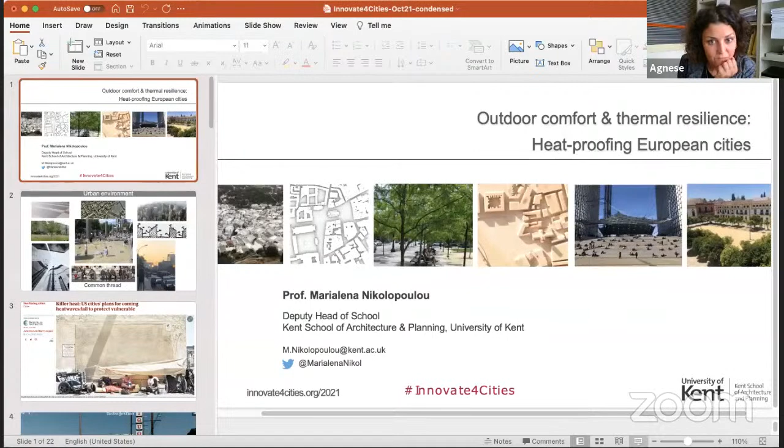So, hello, everyone. It's a real pleasure to be here today. And I would like to focus my discussion on the issue of outdoor thermal comfort and thermal resilience in the context of heat-proofing European cities.

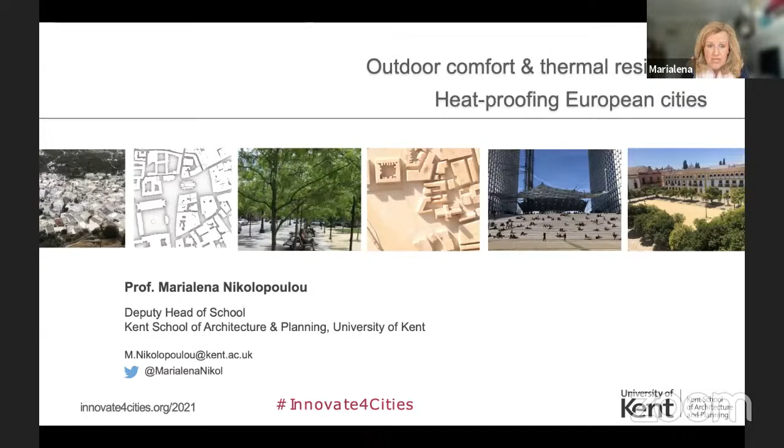As Rohinton highlighted, I'm from the University of Kent, and I would like us just to take a step back and remind ourselves what the urban environment is and what a city is. Effectively, complex systems of interconnecting links: individual buildings, urban blocks, roads, parks, transport infrastructure. All these actually affect environmental quality, which in turn affects human health.

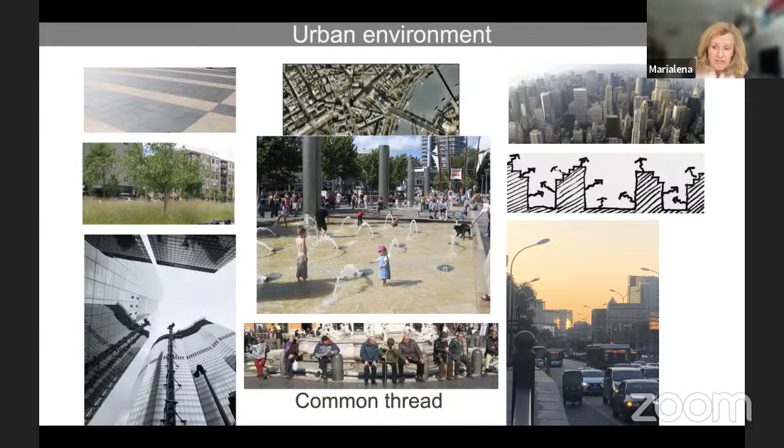And against this very complex background, people are an integral part of this system. In fact, they're the common thread. So understanding how people behave in this system could eventually enable us to use urban design constructively. We could argue to even improve environmental quality, but definitely increase our resilience and our adaptive capacity at different levels.

So it is also important to realize what the implications for development of cities are by putting greater emphasis on outdoor comfort and improving the conditions outside. Effectively, by controlling sources of discomfort, we can increase various types of activities which don't require additional energy: sedentary activities, cycling or walking, and use of public transport.

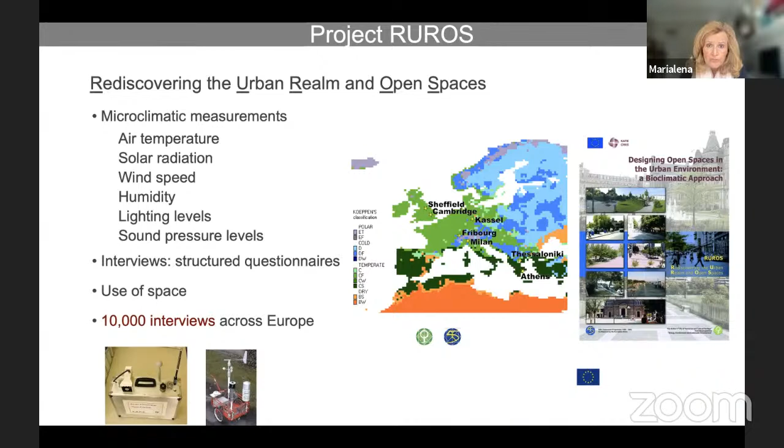It's important to realize that whether consciously or unconsciously, irrespective of where you are in Europe, conditions will be very much affected. So outdoor comfort will influence use of space.

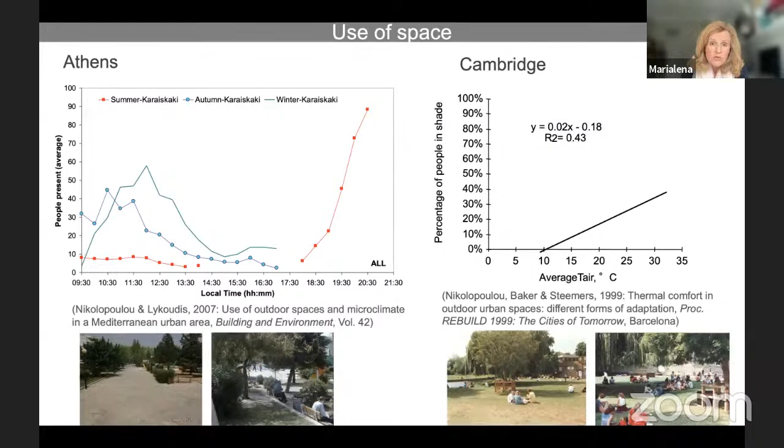And it's not just Southern Europe—we see similar patterns moving further north. Interestingly, even in Cambridge, we'd see people start moving to shaded places or avoiding sunny places as temperatures increased. So this shows the direct relationship between microclimatic conditions, outdoor comfort, and use of space, which is important to remember when planning or designing our cities.

Discussing with individuals, we tried to understand how they evaluated comfort conditions. As expected, across Europe in different countries we see a variety of conditions, and the majority of people would be found somewhere in the middle—feeling cool, neither warm nor cool, or warm.

What became particularly interesting is when we started understanding the conditions of thermal discomfort—effectively where people found it very hot or very cold. You'd probably expect that where you have the coldest temperatures, like Northern Europe, people would complain about very cold conditions because temperatures are lower. But it was completely the opposite.

This highlights that it's not a direct relationship between the stimulation and the perception, but there are other parameters that come into play, important to understand in order to help us improve both personal as well as spatial resilience in cities.

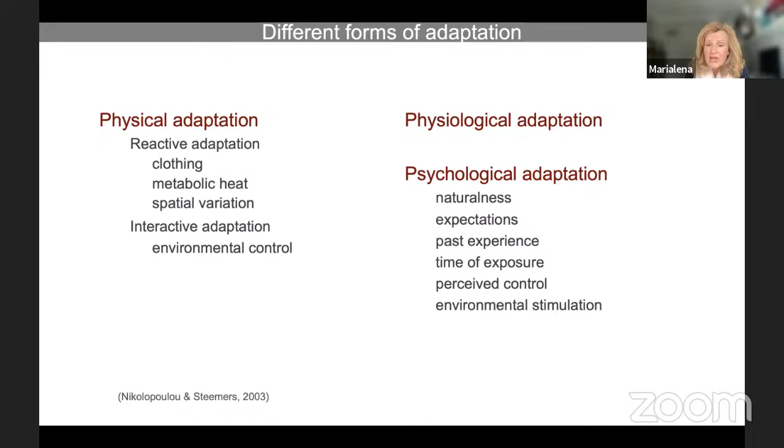Another very important parameter is psychological adaptation. Effectively, all these parameters inform our understanding of the surrounding space—how natural an environment is, our expectations from a specific place, past experiences, how long we'll spend there, whether we can cope with discomfort, and whether we have mechanisms to control it. Our perception of control is more important than whether the mechanism is exercised or not, as well as the environmental stimulation—the reason we find ourselves outdoors.

This is really where design interventions can start having an effect through different kinds of shading we are all familiar with, whether using fabric or more advanced modes of shading—even art used as a shading device—as well as urban morphology.

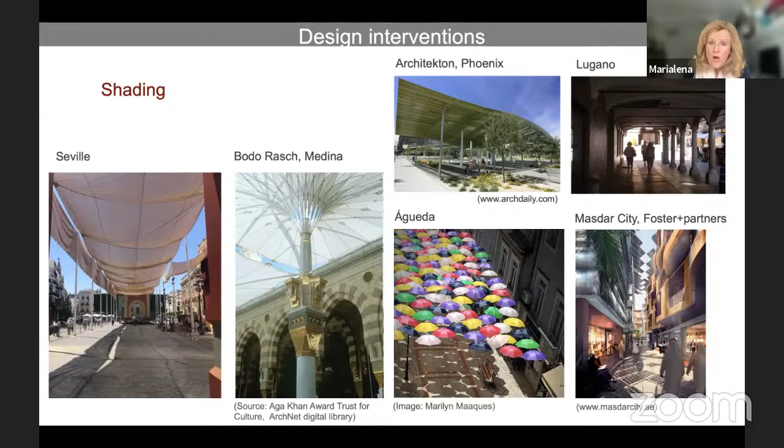Or natural solutions such as vegetation or trees included at different scales, and how we've got a whole infrastructure that can be part of a network, enabling us to use different spaces without necessarily being exposed to the sun, if that is a requirement.

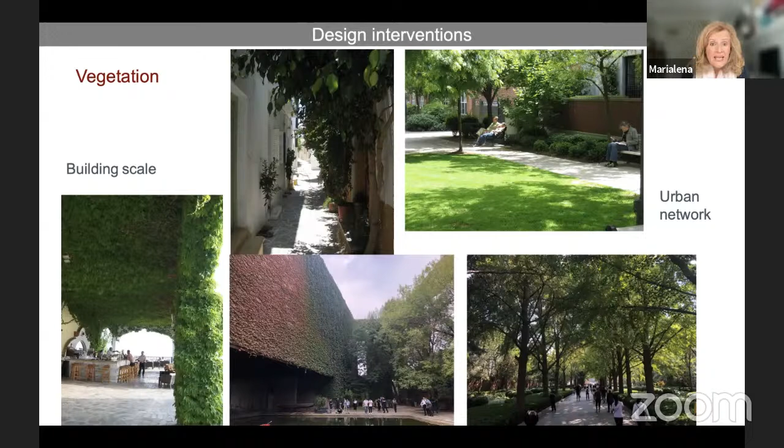Then again, we've got other parameters and other design strategies, and we know that different types of water have been used extensively in design to cool urban environments, leading to great satisfaction.

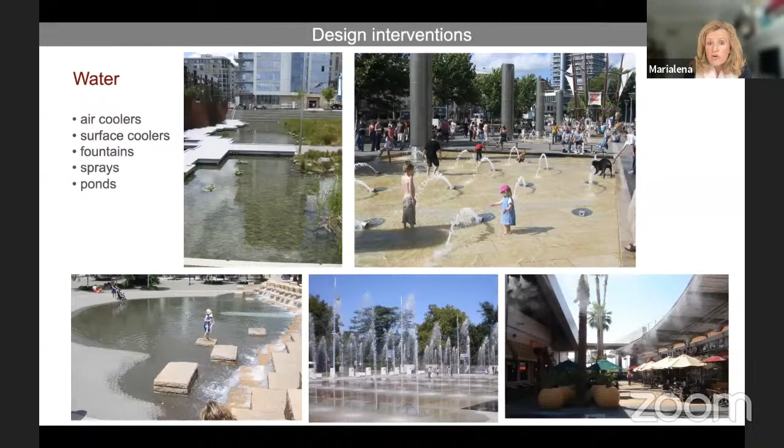And of course, we have different types of materials, from more traditional to more advanced, that can have very different effects and can be manipulated accordingly into the urban environment.

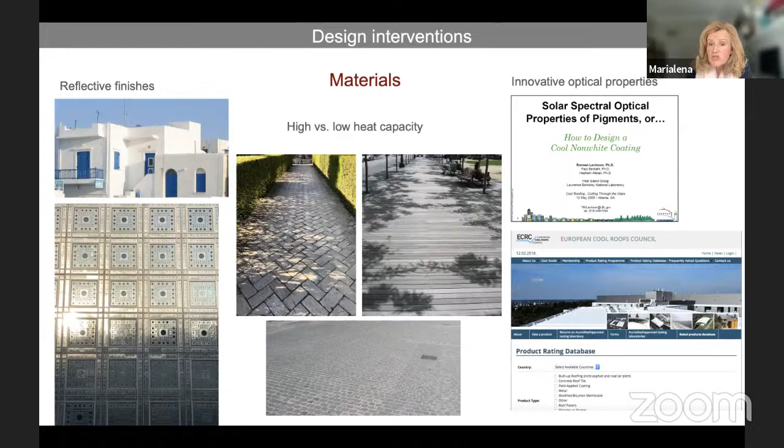It's the materials, as well as, as we've examined in other projects, the urban geometry and what effect that has on surrounding conditions, both in terms of physical parameters and comfort.

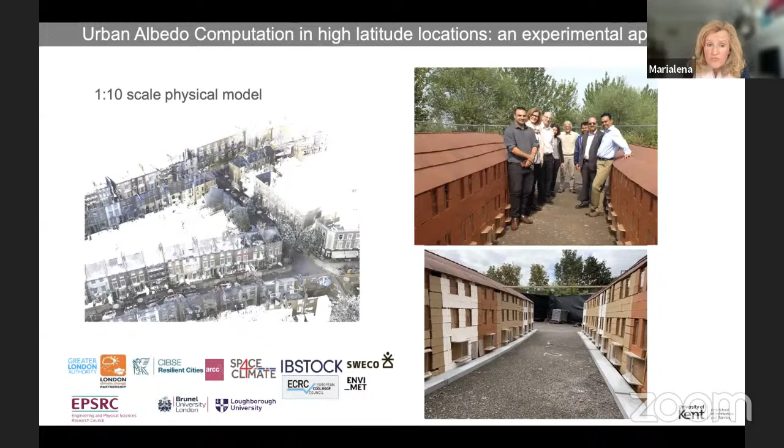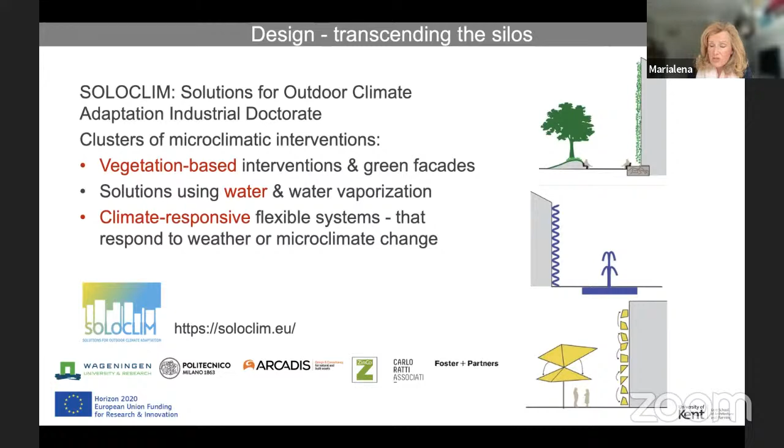More recently, we've started looking at these clusters of interventions and how we can start transcending the silos. It's not really just about vegetation on its own, but how we can start using networks—vegetation-based interventions, water-based interventions, as well as other more flexible climate-responsive systems—for the benefit of urban environments.

One last point I'd like to highlight, beyond the design per se, is the sociocultural influences in outdoor thermal comfort. If I may highlight another study, we were looking at comfort conditions in very similar climatic conditions in Northern Africa, in Marrakesh, and in Phoenix, Arizona, where the temperatures were very similar both in wintertime and summertime.

But they varied significantly in terms of how people were responding. For example, in Phoenix, Arizona, people would be exposed to air conditioning for much longer periods of time—coming out of an air-conditioned house, using an air-conditioned car, before going to an air-conditioned office. For the majority of time they were exposed to air conditioning, which very much influenced their evaluation of thermal comfort, limiting this adaptation capacity.

But what was particularly important, as we discovered, is the socioeconomic background and the influence this has on outdoor comfort as well as outdoor use. What was highlighted from both Phoenix, Arizona and Marrakesh, with very similar findings, was that the lower the socioeconomic background, the more important the need for open spaces becomes.

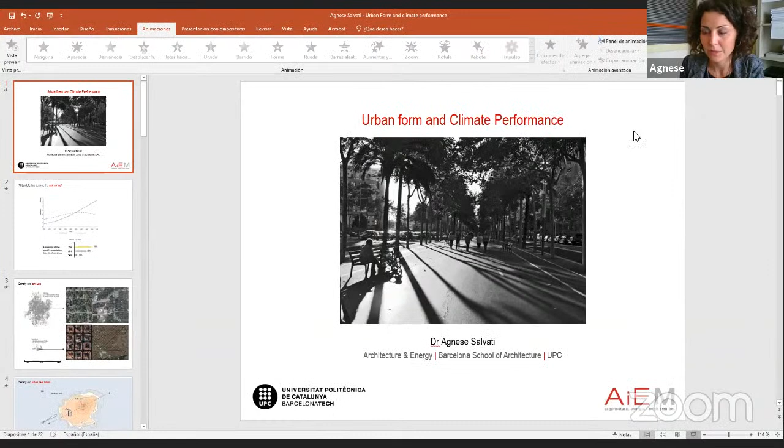Yes, hello everybody, I'm going to share the screen. This one. Okay. Can you correctly see the presentation mode? Okay, yes, okay, hello everybody.

Thank you very much for having me at this interesting conference, and thank you to Marialena for this introduction to my presentation, which is really perfect, because she showed the importance of urban microclimate to understand the well-being of urban citizens. So now I would like to show a few slides about the relationship we found between urban form and urban microclimate, and how urban form can affect the microclimate performance of cities, in particular Mediterranean cities. So I will show some results for Barcelona.

I think this is a very interesting, urgent topic, because as we know, urban population has already overcome rural population, and the trend shows it will still grow. So we need to design cities that are able to accommodate this increase in population, and the most efficient way to do it is probably by increasing density, increasing building density.

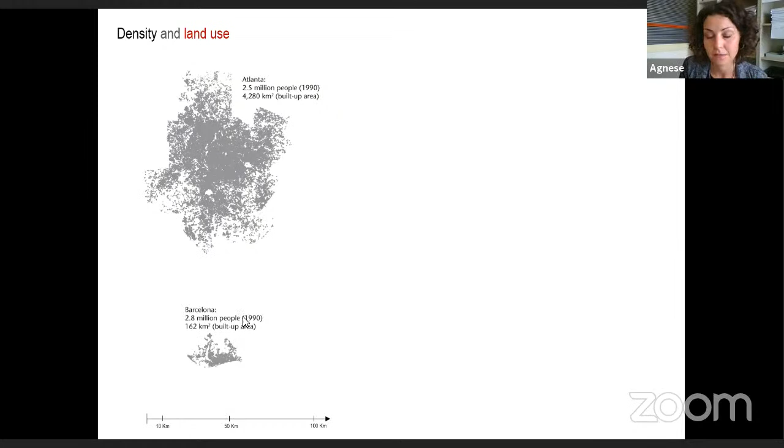And this is why compact, dense cities are said to be more sustainable models. Why? Because if we compare, for instance, these two cities, Barcelona on the bottom with Atlanta, they have basically the same population, but as you can see on the same scale, the footprint of the cities is quite different. It means Barcelona has a lower footprint, and so a better environmental performance, urbanizes less new land. But of course, this has an implication on the form of the urban fabric and the density of the buildings. The urban fabric in Barcelona is much denser than in Atlanta, with implications for the space for vegetation and other implications on urban microclimate.

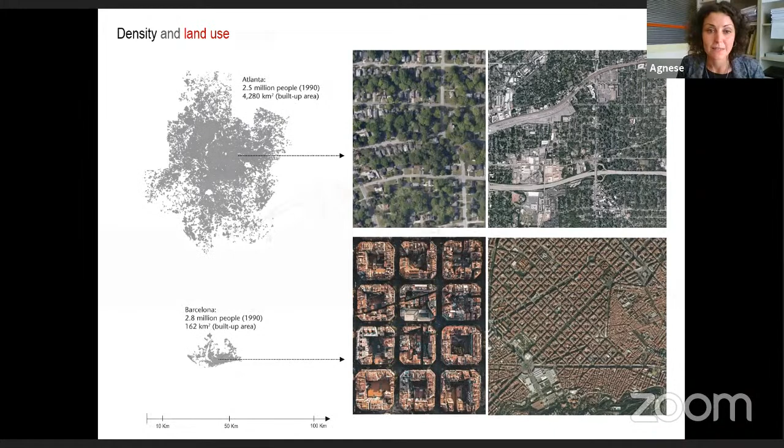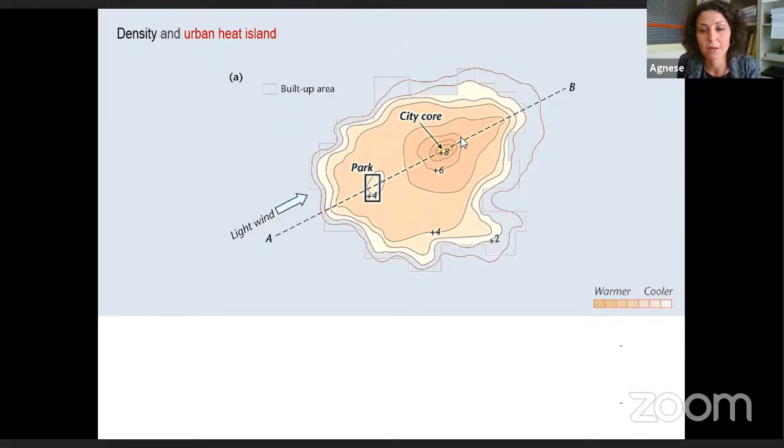Because what happens is that when we increase the density of a city, when we increase the density of buildings, we also intensify the so-called heat island effect. So if we think about a city, we know that the urban temperature is higher than the surrounding rural areas because of many factors, and one of the most important is basically the density of buildings.

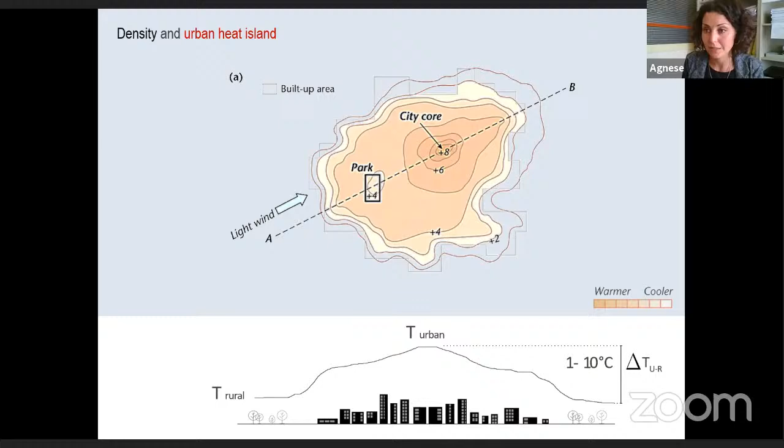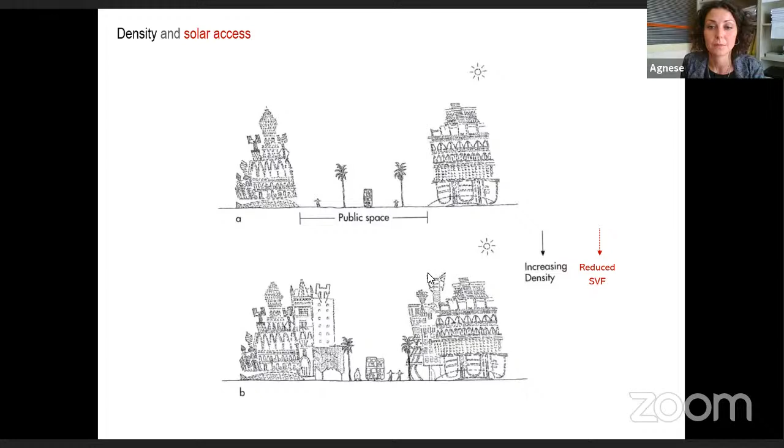In fact, the denser core of the cities, the city center, is generally the hottest spot in a city compared to the rural environments that are a cooler area. So in a dense, compact city, we generally have a strong heat island effect, a strong increase in urban temperature. On the other hand, when we increase the density of buildings, we reduce the public space.

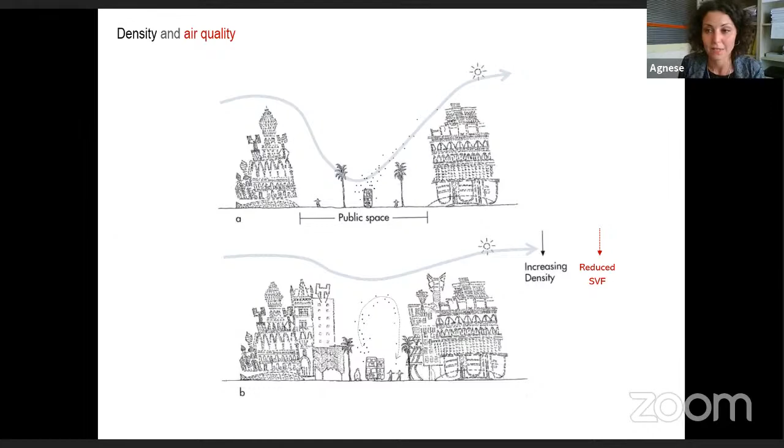This has implications on the solar access of streets and facades, and also on the ventilation of public spaces, or the so-called urban canyons, the streets, which causes also an increase of contamination levels. So compactness or density comes at the cost of some microclimate implications that are probably not so favorable in terms of energy efficiency or microclimate performance.

That's why we wanted to investigate a bit more in a city like Barcelona, that today looks like this, a very compact and dense city in the Mediterranean region. Is this a sustainable model in terms of energy efficiency and also microclimate performance, considering this impact of density on urban temperature and heat island effect?

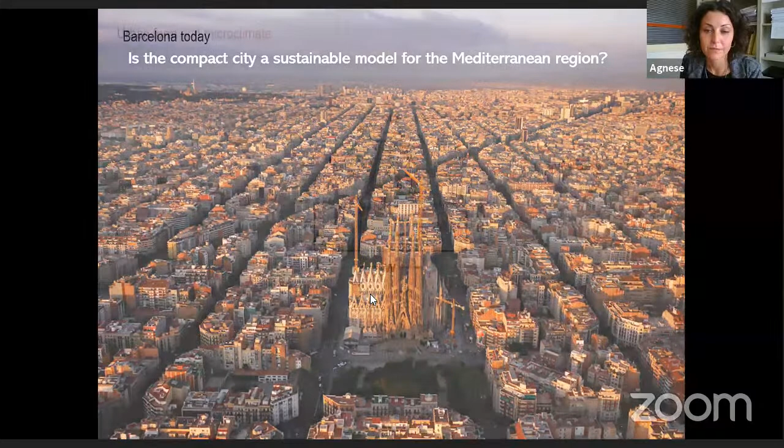So very briefly, the main parameter that affects the increase of temperature in a city is the sky view factor, which means the percentage of sky that is seen by a horizontal surface like the street or the buildings. This openness to the sky has a very crucial role in determining the urban temperature, the urban microclimate.

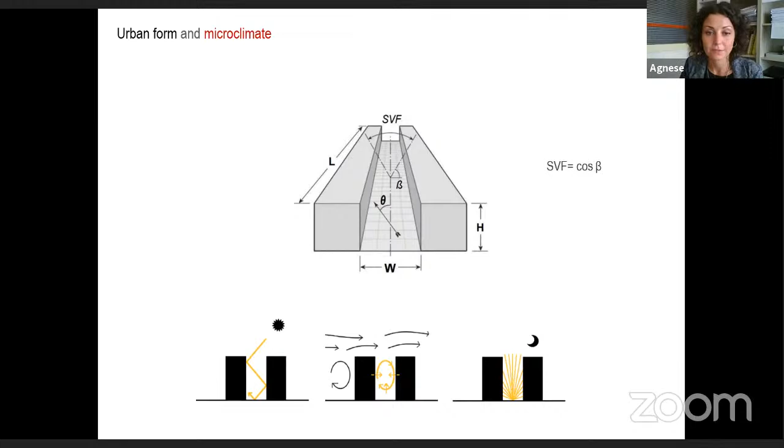This is because it is related to the ability of the urban fabric to trap solar radiation, to the ability of wind to penetrate into the street and cool the surfaces, and also to the ability of urban surfaces to cool down during nighttime through long wave radiation emission. So this parameter is very important to understand the climate performance of a city or a neighborhood.

If we compare the morphology and the sky view factor of these three textures, we will see that they have a different microclimate performance. These three urban textures have different openness or sky view factor of the streets and inner courtyards, because many typologies have an inner courtyard. And what we realized is that even if all of these are compact or dense urban forms, they do not perform the same way in terms of microclimate.

For instance, the urban texture on the left has an intensity of heat island, an increase in urban temperature, that is higher in winter than in summer. It's the same for the second urban texture, while the last one has a higher heat island effect in summer than in winter, meaning that the temperature increase in the urban area is stronger in summer than in winter.

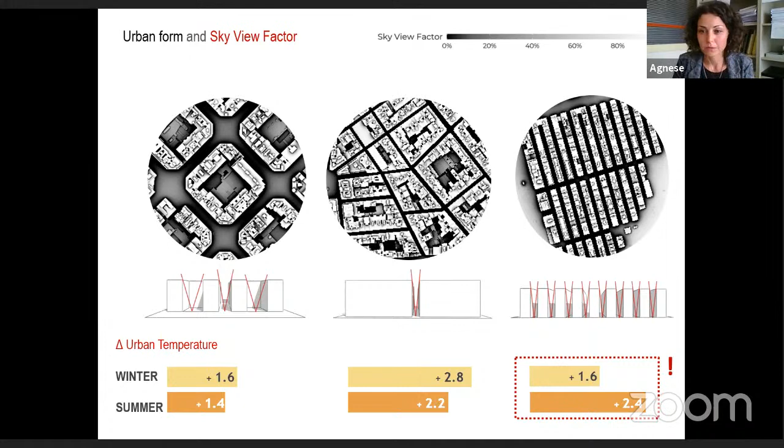That is something we definitely do not want in a climate like the Mediterranean one, that already has hot summers. So that's why we arrived at a sort of conclusion that can be a guidance to understand quickly how different urban fabrics perform in this climate context.

We need to look at two different parameters of density. So density is not the right word. When we want to analyze climate performance, we need to specify what kind of urban form or built form we are dealing with. We can have urban areas with high vertical density, with a high amount of facades, because there are buildings with an increase in height or building typology that also have a big amount of facades.

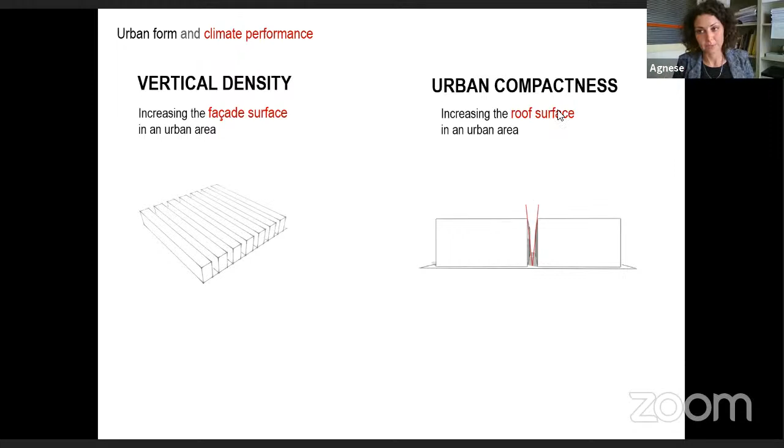Or we can have textures with a high degree of compactness, where buildings are very close to one another, with an increase of roof surface. In an area with high vertical density, all these facades absorb a lot of radiation in this climate and determine high heat island intensities in summer.

On the other hand, compact urban textures in summer are sort of protected by the roof surface that reflects the radiation toward the sky, and in winter have a heat island effect that is strong, but in the end is also useful to the overall energy performance of the area.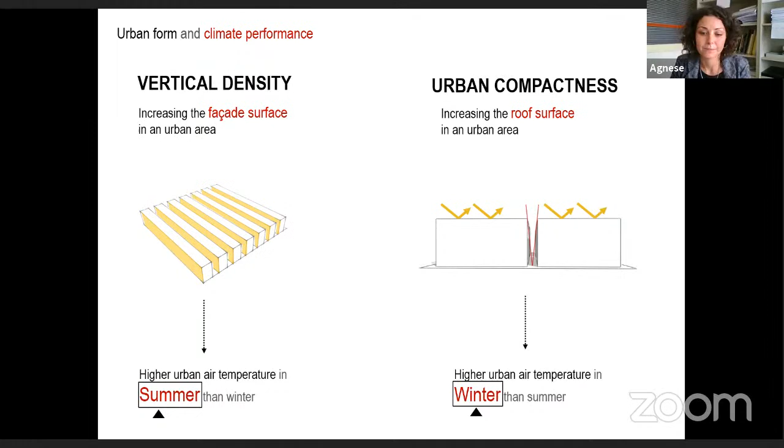So this was just a very quick presentation, some results to arrive at this conclusion: that urban form can really be controlled or designed to improve urban microclimates. Density can be achieved in different ways, and it also means we'll have different microclimate implications.

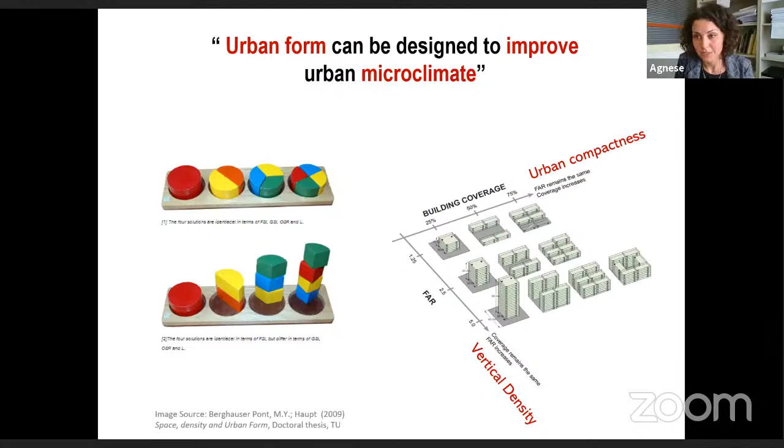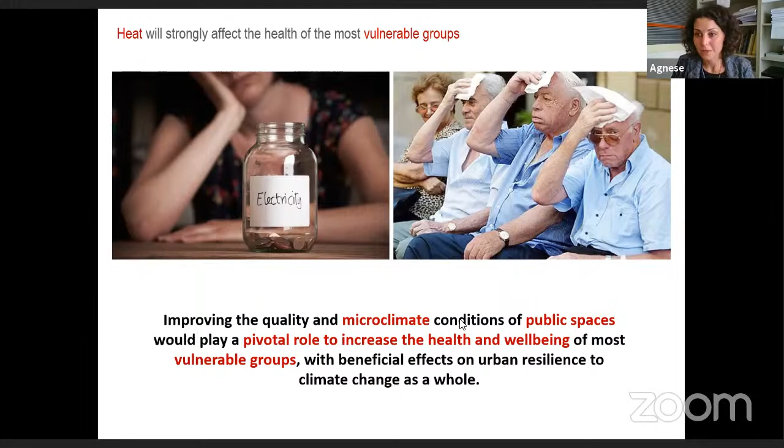This is important to understand for all the reasons Maria Elena explained in the first presentation, because urban air temperature will increase the effect of climate change. The increase of heat waves and higher temperatures will be stronger in cities, and this will affect the most vulnerable groups in urban areas that already live in places that often don't have good public space in terms of microclimate conditions. So this is something we'd like to improve in this city and in all cities, and this is why we think it's an interesting topic.

And thank you very much.

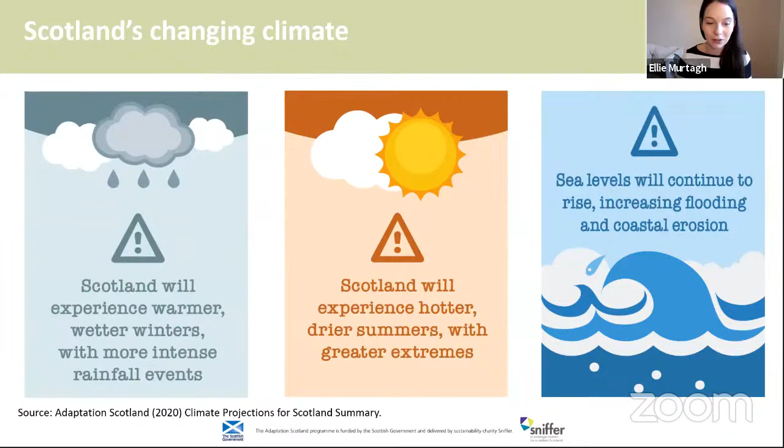So how is Scotland's climate changing? We expect warmer, wetter winters with more intense rainfall events, as well as hotter, drier summers with greater extremes. It's these greater extremes of high temperature, such as heat waves, that can be a little challenging to communicate, because here in Scotland there's historically been a perception that increasing temperatures and heat wave events will be welcomed by Scots, since we're typically quite a rainy and temperate climate.

However, this perception is increasingly being challenged by the climate impacts we're already starting to witness and experience. For instance, both the summers of 2018 and 2021 experienced heat waves in Scotland, with quite wide-reaching consequences, such as disrupting travel and affecting major transportation routes, through to actually melting the roof off the Glasgow Science Centre - which, for those coming to COP26, will be relieved to know has been fixed and made more resilient for the future. It's these tangible effects of heat waves that have actually started to change the perception of Scottish citizens.

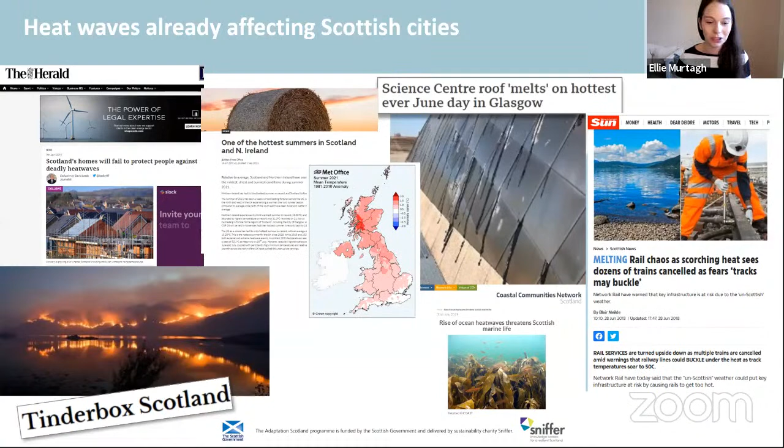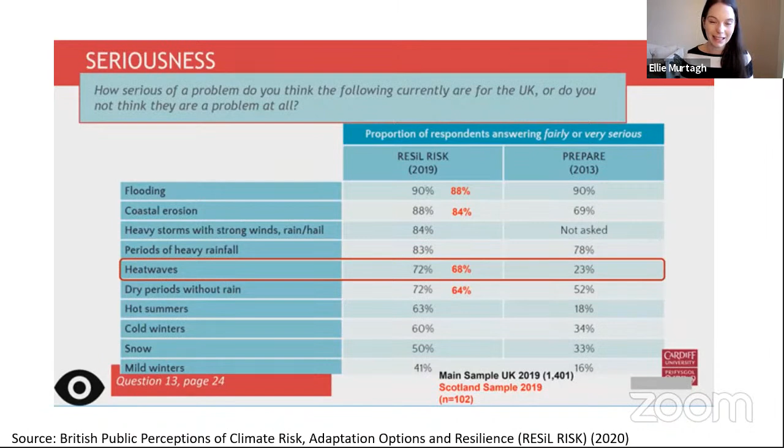For example, recent research via the RESiL RISK project, which studied British public perceptions of climate risk, included a Scottish cohort, indicated in the red figures on my slide. They found an increase in feelings that heat waves would affect people locally, although in Scotland that figure is still quite low - about 11% of those surveyed felt it would affect their own community and town. However, at a national level, there was a perception that heat waves will affect the UK, though again the Scottish figure was lower than the UK survey overall, at about 68%, probably due to differences in climate across our nation.

And that's where Adaptation Scotland comes in. We run a number of knowledge exchange and working groups to try and enhance people's understanding of adaptation and accessibility to resources to help them.

One of the ways in which we do this is through convening a benchmarking working group of about 30 public bodies across the country to understand what is current best practice, as well as knowledge exchange and sharing. One of our most recent events was actually on heat risk and mortality in Scotland.

We were quite privileged to hear from researchers working on the OpenCLIM project, which is developing new methodology for the forthcoming UK National Climate Change Risk Assessment 4. They have been led by the University of Bristol, the University of East Anglia, and the Tyndall Climate Change Centre. Their emerging findings revealed that heat-related mortality in Scotland will be centred around our urban areas, namely Glasgow, Dundee, Aberdeen and Inverness. This highlights the important role of risk assessment in being able to plan and prepare for such impacts.

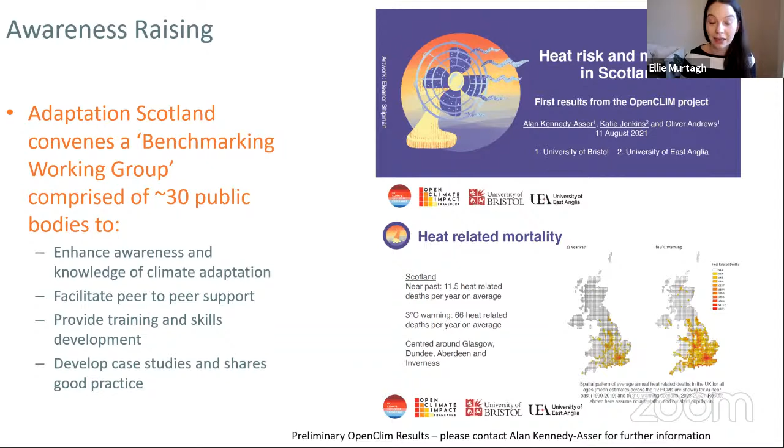Now, in the UK, we are very fortunate that we have the CCC, the Committee on Climate Change, as well as the UK Climate Resilience Programme, which together produce a UK climate change risk assessment every few years, the most recent of which was just released this summer. My charity Sniffer authored a report that digested that and put it towards a Scottish summary.

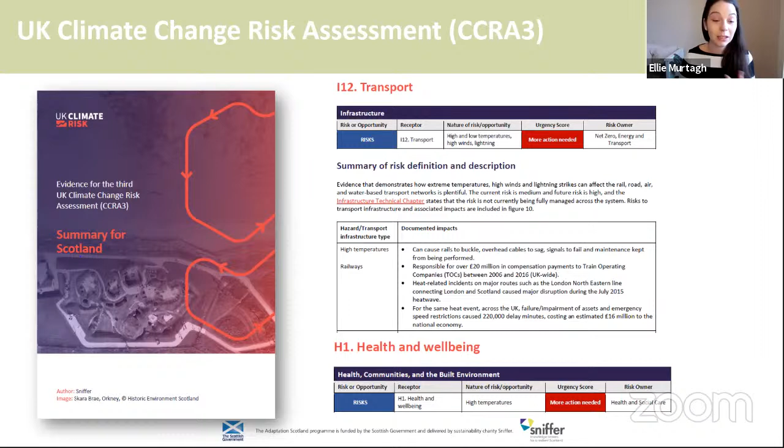My colleagues highlighted a few risks related to high temperatures and heat waves, namely the effects on transport, as well as human health and well-being. As you can see on the slide here, the urgency score associated with those risks is 'more action needed.' This is recognition that high temperatures are coming and we as a nation are not prepared for them. In addition, the report really stressed the need to understand and unpack the interdependencies between risks. In relation to high temperatures, that can relate to the combined exposure of air pollution, drought, and wildfires. That's been highlighted as an area for further research that is needed.

Now, Sniffer also delivers risk assessment information at the sub-national scale as well. For example, through the work of Climate Ready Clyde, which is a cross-sector initiative co-funded by 15 organisations operating in the Glasgow City region, which pull together to create a joint adaptation strategy and action plan. In 2018, they released a climate change risk and opportunity assessment, which highlighted the potential risks associated with increasing temperature and the need for further research.

Investments in our built environment and infrastructure projects offer major opportunities to increase our resilience and enable adaptation, not only for our current generation, but for many future generations to come, given the long lifespan of infrastructure and the important role demonstrated by the previous speakers. So far, this toolkit has actually been used in practice to consider an array of climate hazards, including increasing temperatures and heat waves, and has been used by the University of Strathclyde and NHS Greater Glasgow and Clyde to inform their major developments.

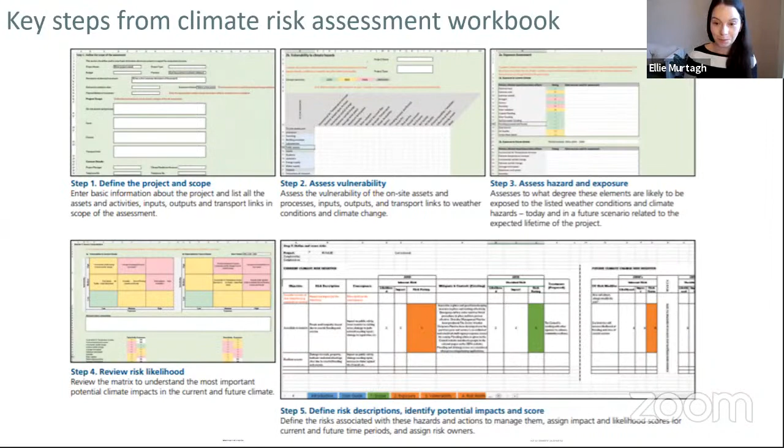Now, as part of this toolkit, it also contains what we call an adaptation options library, and it allows users to review different potential actions that they can take in practice.

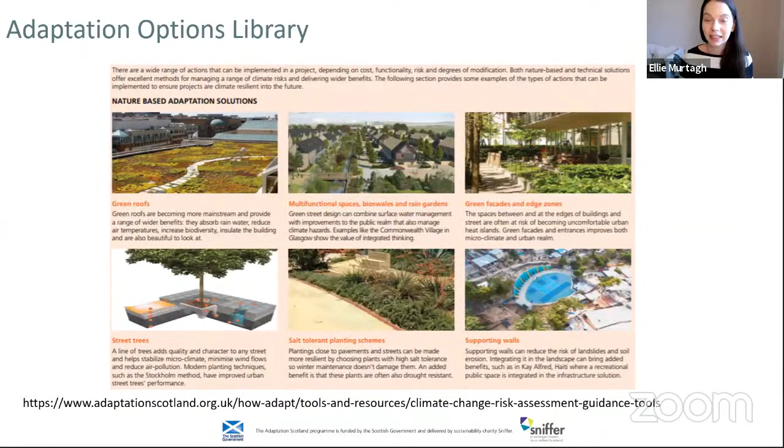Conversely, if we start to visualize what an adapting city may look like, lots of those issues have been addressed through in-street rain gardens, increased green spaces, local growing, all introducing the shade that previous speakers stressed as important, in addition to retrofitting buildings, reducing car parks or making them green car parks with green infrastructure on roofs or walls, as well as increasing the resilience of key service providers such as transport and health.

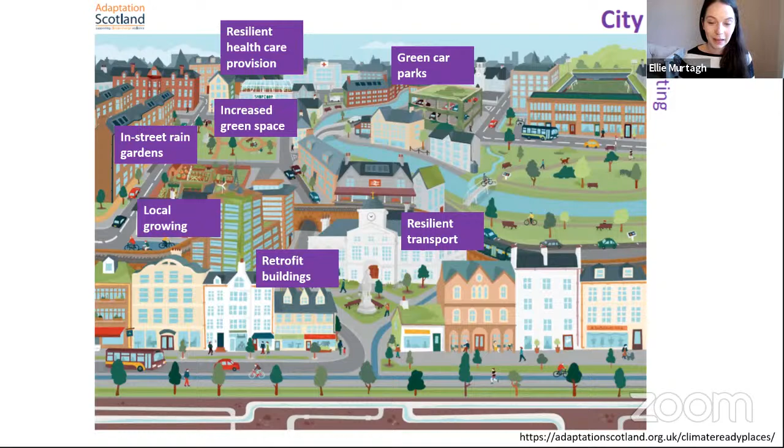But cities aren't just made up of buildings, they're also shaped by the people who live and work in those areas. That's why it's important to consider how adaptation can be implemented within workplaces, and that's why Sniffer is currently working with the Scottish Trades Union Congress, STUC and Unison, to develop adaptation guidance specifically for them. These next two slides indicate some emerging findings from work with trade union representatives.

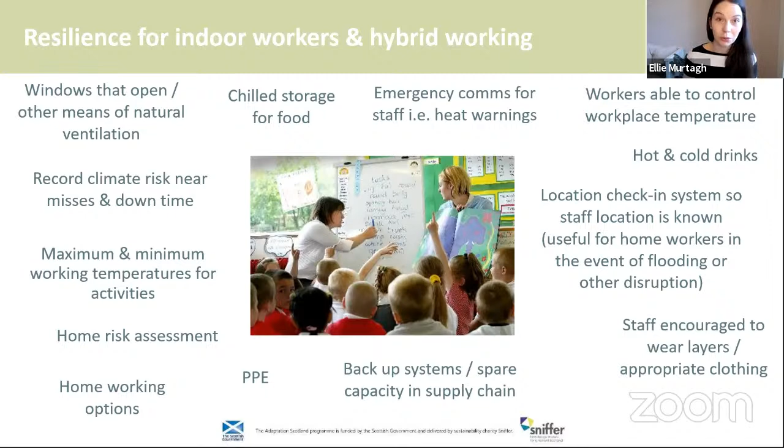Some example adaptation actions that are needed: for indoor workers, we need to ensure ventilation, appropriate uniforms such as PPE, and flexibility in working hours. Similarly, for outdoor workers, there's a need to introduce a maximum temperature for outdoor working, which currently doesn't exist in Scotland. We also need actions to enhance welfare, such as cold water, shading, freely available sunscreen, and cooling rooms if needed.

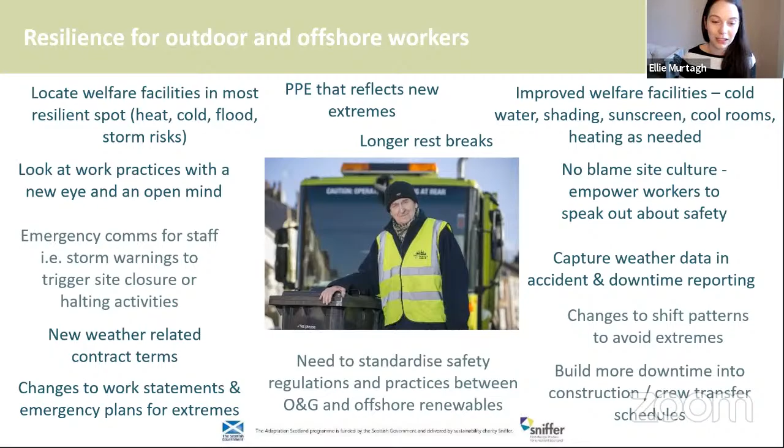For example, the need to increase nature-based solutions, one example of which is the introduction of the Clyde Climate Forest, which includes urban tree planting within Glasgow City region.

But it's not just Glasgow. Other Scottish cities are also starting to recognise the need to adapt to increasing high temperatures, such as Aberdeen Adapts. They have an adaptation framework which recognises that over a third of their building stock was created pre-1945 and was designed for a very different climate, highlighting the need to consider adaptation with any retrofit building programme.